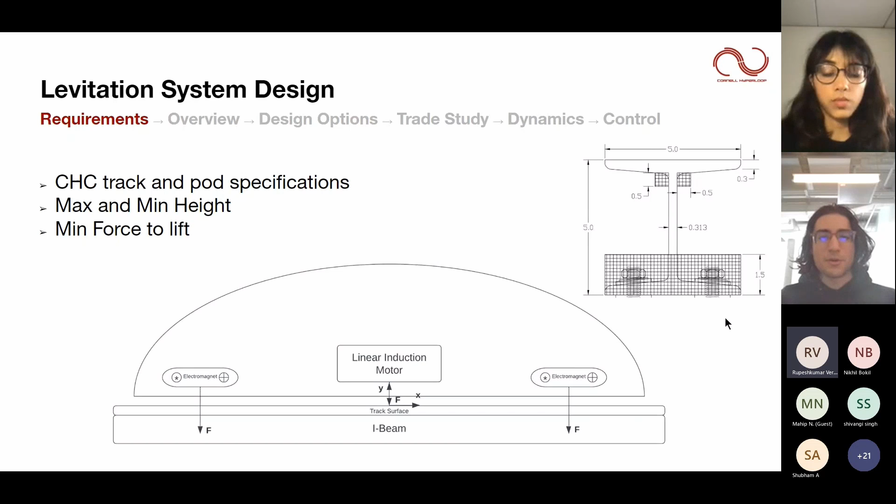And also because of the CHC specifications, we know that these magnets can lift a maximum weight of like 256 kilograms. So we use this mass as the requirement mass that we know that the electromagnets need to actually lift. So what are the drivers of a successful levitation system? From our research, we know that successful levitation utilizes two phenomena. One is the Lorentz force law, and the second is the successful generation of eddy currents.

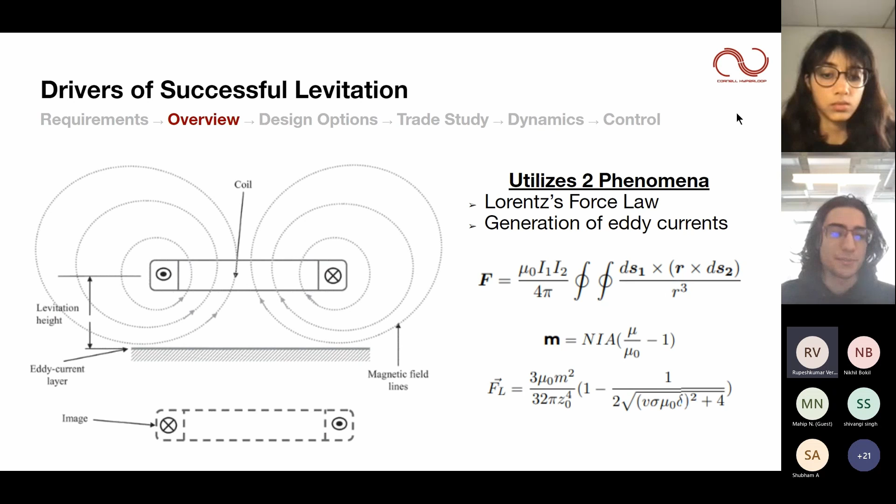So how do we actually generate eddy currents? We need two things in order to generate an eddy current. One is a changing magnetic field. This can come in the form of relative motion, or in the change of an actually alternating magnetic field. So that's the first thing. And the second thing we need is an actual conducting plate in order to induce those eddy currents into. And this is most graciously provided by CHC in the form of our aluminum track.

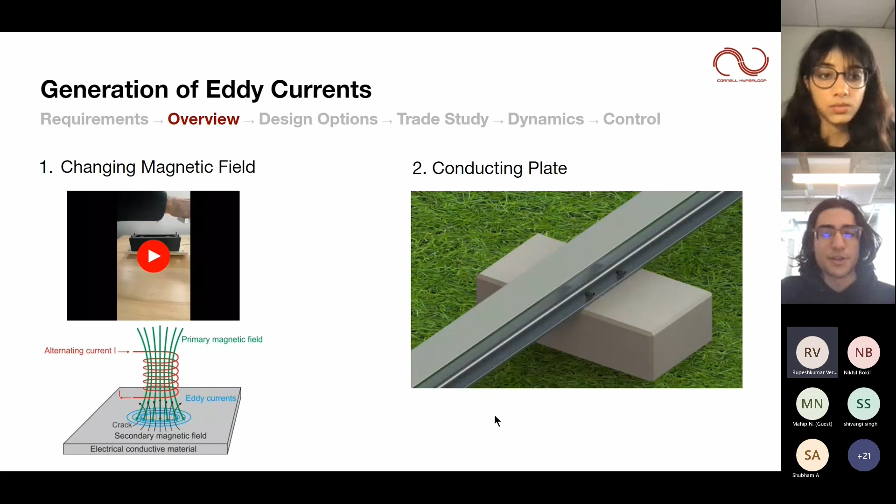Because our pod is moving in relation to the track, of course, we naturally have a changing magnetic field just as a result of relative motion between the two. But if we were to not be moving, then this is a different design consideration that we need to take into account.

So in order to actually go about designing our system, we wanted to define the states of the pod very clearly. And the highest level that, again, we found was the pod could have two states, not moving or moving. So in state 2, which is what we've defined as the pod having a non-zero velocity, again, the changing magnetic field that we need to induce an eddy current and thus induce a lift force comes as a result of relative motion.

So we can actually get this just by using electromagnets if we would like to control the actual magnitude of the lift forces as a result of a controlled current, or we actually can just use a regular permanent magnet such as a neodymium as a common one. This would lead to just a constant lift force and only changes based on speed.

But if you wanted to use a DC electromagnetic system, then you could actually control the lift force a little bit more. But in state 1, because we don't actually have a relative motion between the two, a permanent magnet and a DC electromagnet will not work. As a result, we would need to use an AC electromagnet in order to flip the polarity of the current and therefore the magnetic field in order to generate this lift force that we'd like when we're actually stationary.

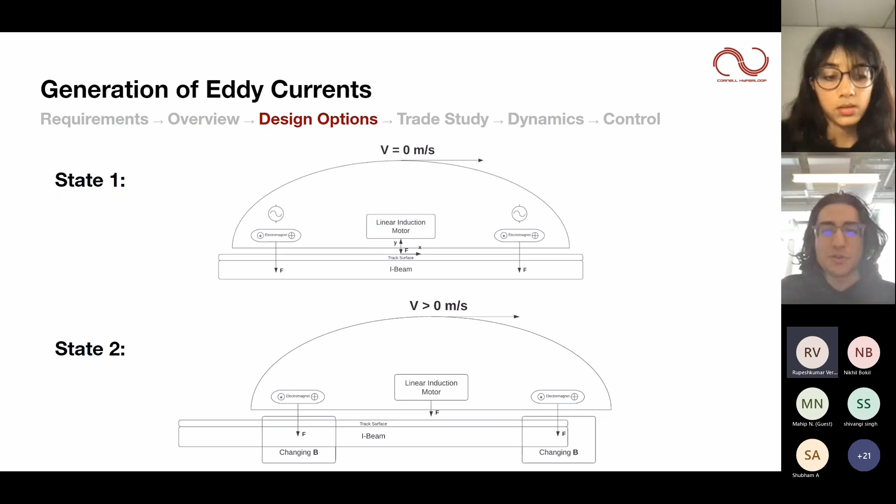So given these two states, we arrived at these two general design configurations. Would we like to use AC electromagnets and levitate when we're standing still, or would we like to use a DC electromagnet and levitate more strongly when we're actually moving? So this was the main design trade study that we had to do because we had to really focus on where we wanted to actually levitate.

We definitely need to levitate while we're moving because the lift force generated by the linear induction motor isn't very strong, and also we need a more dominating levitation force in order to ease our control systems, which Mahika is going to go into a little bit later. But these two design options are the two options that we think give us the most freedom or the most breadth as far as which region we can levitate in.

So our first option that we looked into was actually just using a combination of DC and AC electromagnets. The way that this would operate in principle would be when we're not moving, when our velocity is 0, we would supply power to our AC electromagnets in order to create this periodic magnetic field, and this would allow us to levitate before the linear induction motor kicks in.

We actually start moving, and then once the pod has a non-zero velocity, we switch our power to the DC electromagnets, and from there we now have a more easily controllable magnet lift force. And then vice versa, when we actually go to slow down, we decrease the power to the DC electromagnets and then switch power to our AC electromagnets.

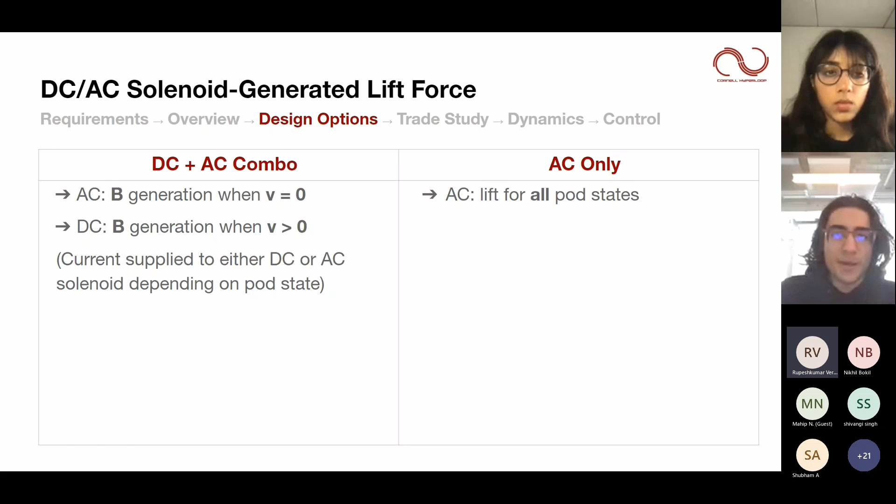So how does this trade study hold up? The DC and AC combo gives us a nice trade-off of stability and control. The stability coming from we can use DC electromagnets and effectively have a permanent magnet that we can control the strength of when we're moving, which is really nice. And then the control is quite simpler for DC, and then with AC, when we're standing still, we don't really have to worry about our motion.

And this is a problem that we've seen somewhat solved in a few areas. So those are two of the main things. But Mahika can go into a little bit more detail about the rest, as well as the dynamics and the control of the system.

Like Jack said, we have two design options here. We have listed DC and AC as higher stability because making the trade-off from AC electromagnets to induce levitation to DC magnets that will maintain levitation with a pod velocity that's not equal to 0 means that we don't experience an oscillatory lift force that we would experience with an AC electromagnet combined with a moving pod. But obviously that makes for a control system that's a little bit more difficult.

Another concern that we have with using AC-only electromagnets is the thermal strain that we would be placing on our solenoids, since we would theoretically have to vary the frequency and the magnitude of the voltage to accommodate. But the good thing about the AC magnets is that we reduce the number of components since we don't have two separate systems. But overall, our final decision for our plan of record was to go with the DC-AC combo electromagnets because they work for all levitation regions. So that's kind of our reasoning there.

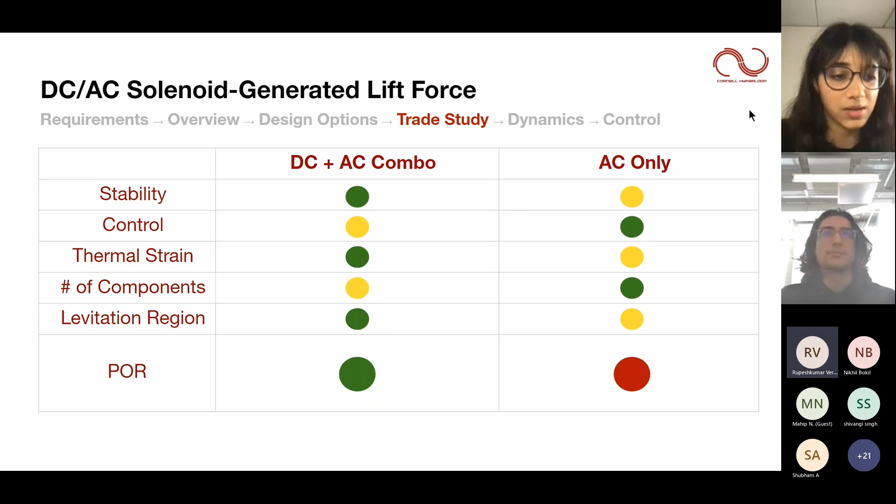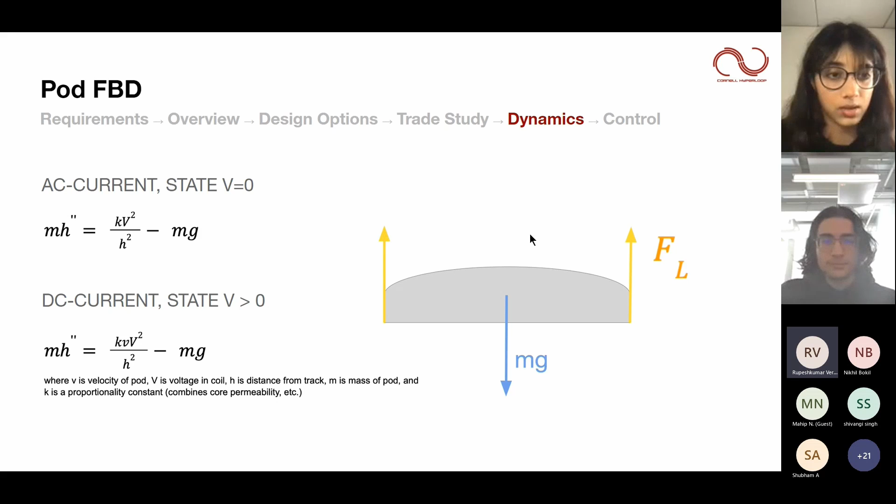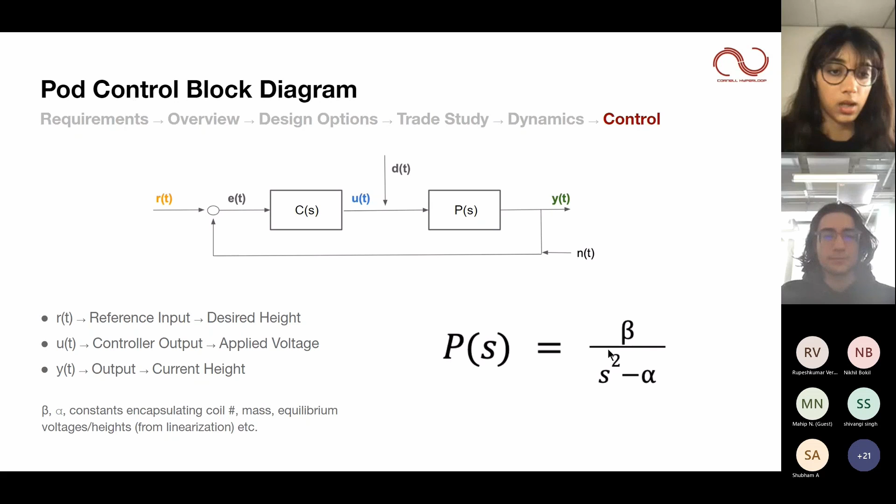So, to the point of developing a model for the system dynamics and the control, you can see two generalized equations of motion for the AC current state and the DC current state. This aids us in developing the plant transfer function in our next slide. Linearizing our system using those previous equations helps us determine the plant transfer function, which is basically how our system responds to a certain input signal or input disturbance. Once we've categorized our plant transfer function, we can use our generalized control system feedback loop to develop our controller function. So going to the next slide.

As of now, our controller is undefined because we have a prioritization on characterizing system dynamics, which means that even though we have our generalized equations of motion, summation of forces, we actually do need to see how our specific system is going to be designed and the specific dimensions and everything to be able to characterize exactly how the system responds to input signals.

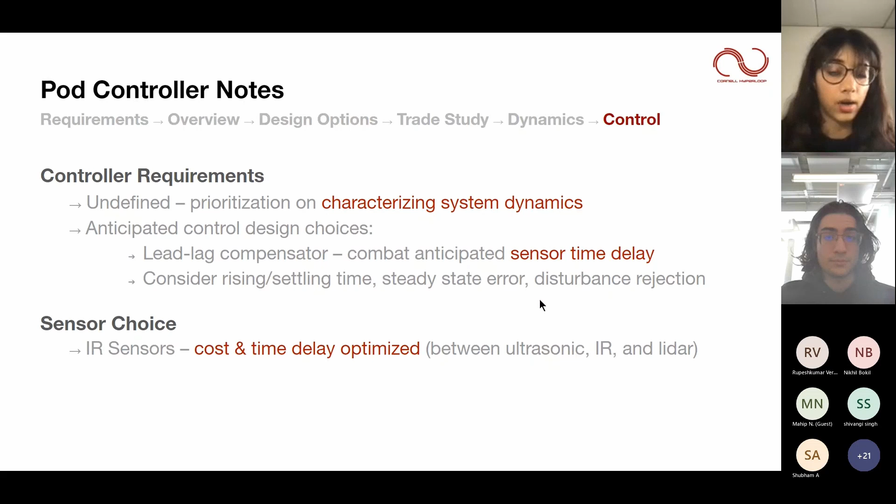But the anticipated control design choices are that we will be using some sort of lead-lag compensator because we are anticipating some sort of time delay from the sensor. And we will also have to consider our rise time and settling time to prevent introducing instability into our system, optimizing steady state error and disturbance rejection. As for sensor choice, which is what informs our feedback loop, we are planning on using IR sensors because they are cost and time delay optimized when choosing between ultrasonic, IR, and LiDAR sensors. And these are our references. Does anybody have any questions?

Yeah, we are open for questions now. Anyone having any questions, please go ahead.

If anyone else doesn't have a question, I have a small question. Will your AC and DC systems be physically different, or will the same physical setup be supplied AC and DC current and then made to work accordingly? Yeah, that is a big design consideration that we have: can we use essentially the same one electromagnet on each and just supply a different current.

We looked into a few different manufacturers of electromagnets. However, from our research we couldn't find electromagnets that we could just buy off the shelf that would work with both AC and DC current. So if we would like to move with that option, which I think would be a very size, weight, and power efficient way of going about it, we would likely have to manufacture those magnets ourselves, or at least assemble all the components of them ourselves, which would be a lovely challenge to take on. But a lot of our ideology so far this semester has been that we would like to design the system first and then optimize second.